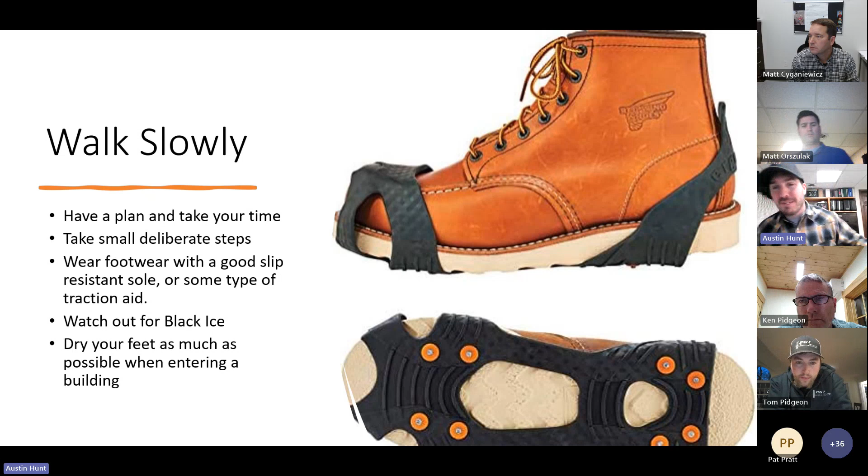In the winter or all the time, avoid carrying so much that you obstruct your view. Scan your route 6 feet ahead. Have a plan, take multiple trips if you have to. Ask for assistance or use equipment that's on site. It might be asking the operator to just pick something up and move it for you, so you don't have to. Just be careful and ask for help when you need to.

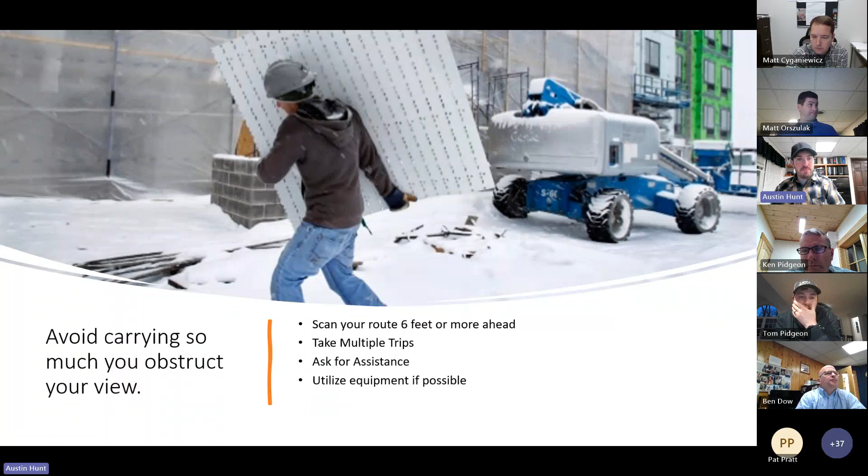Take extra care when you're getting out of vehicles and equipment. Use those 3 points of contact, use handholds to get down. Step slowly out onto the surface and test it before you step down. Put your full weight on there, because don't just jump down and have the piece of equipment thinking the ground's fine. That's how things happen. We've had people fall, hurting their shoulders, things like that, hurting their knees.

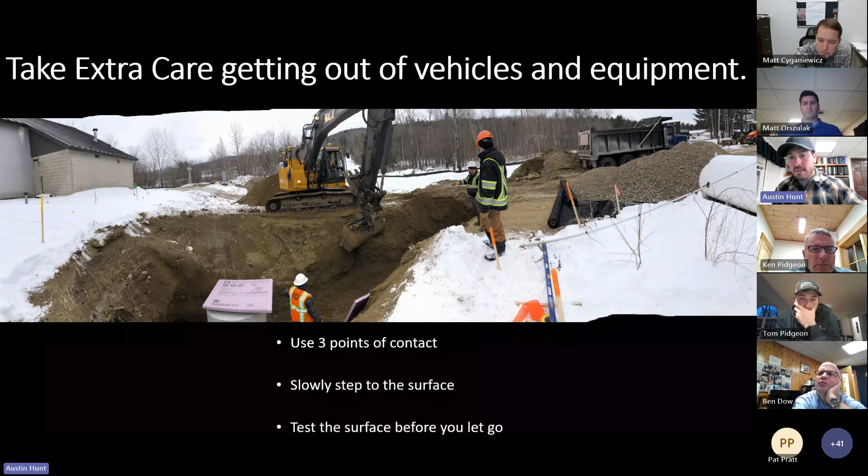Frost blankets: don't walk on a snow-covered or ice-covered frost blanket. You never know what's hidden under the blanket or the snow, tools, materials. The blanket might be covering an open hole. Last year we had an issue with someone who walked across a frost blanket and then stepped in a hole that was underneath it.

If you do need to walk on them, make sure the snow and ice is clear, make sure it's dried off, and make sure things are marked underneath so you don't end up stepping in a hole or tripping over some material left under there. In the winter, say on a concrete site, there's a lot of wood involved, and a 2x4 that was pretty visible the first day could be covered up overnight by snow. So you got to look out for those things.

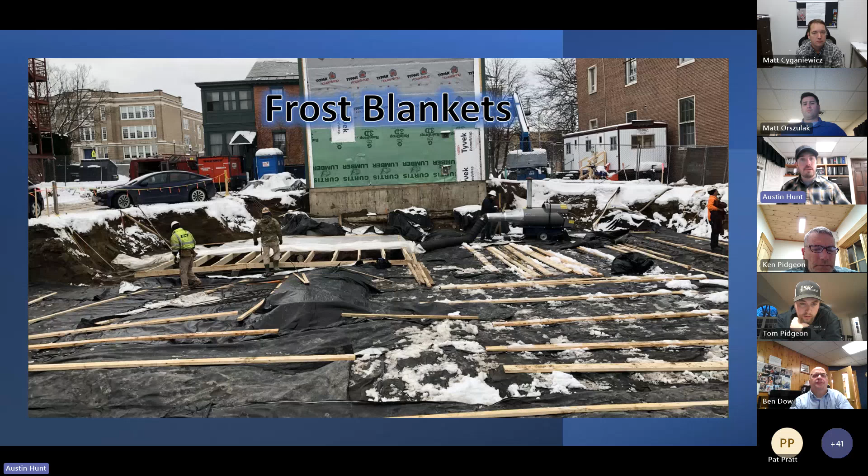Keep your work site safe. Every morning, if you've got snow, make sure you take the time to clear it off where you're going to walk and where you're going to work. If you need to, use salt or sand to assist in traction. You should have some type of salt or sand on site every day in case freeze-thaw creates ice, you need to melt it. So have that salt on site in a 5-gallon bucket or something.

Try to keep your work areas as dry as possible. So if you've got a concrete mixer, make sure they clean out and don't leave a big water spot where it's going to freeze right in your walkway.

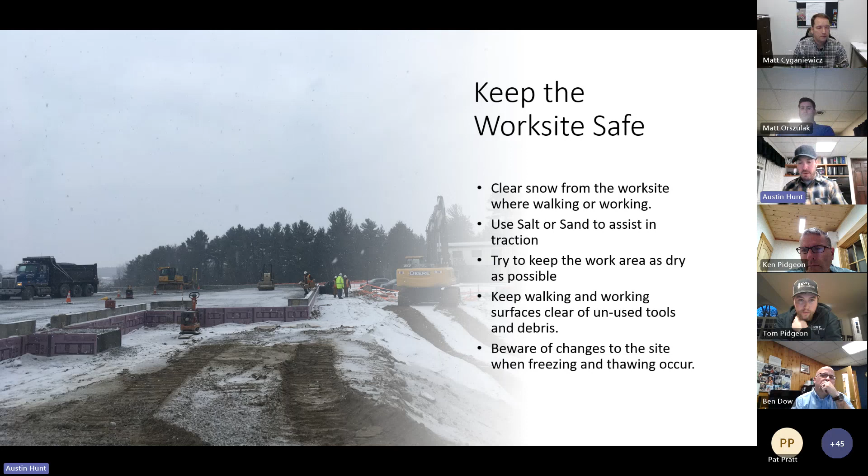Be aware of the freezing and thawing. It's not just the ice you got to worry about, it's the mud too - that gets slippery as well. Another tip I found: if you have a slope you have to walk up and down a bunch of times, build a nice stairway down to it. Just be safe, take it slow, and watch what you're doing. That's all I have for you.

Plan ahead is one of the best things we can do in winter conditions - really plan ahead and try to eliminate slip, trip, and fall hazards using the best practices Austin talked about. If I'll be walking on frost or concrete blankets, the best thing to do is throw down a couple planks and make sure they stay dry and ice free, so you're standing on something firm that won't slide under you.

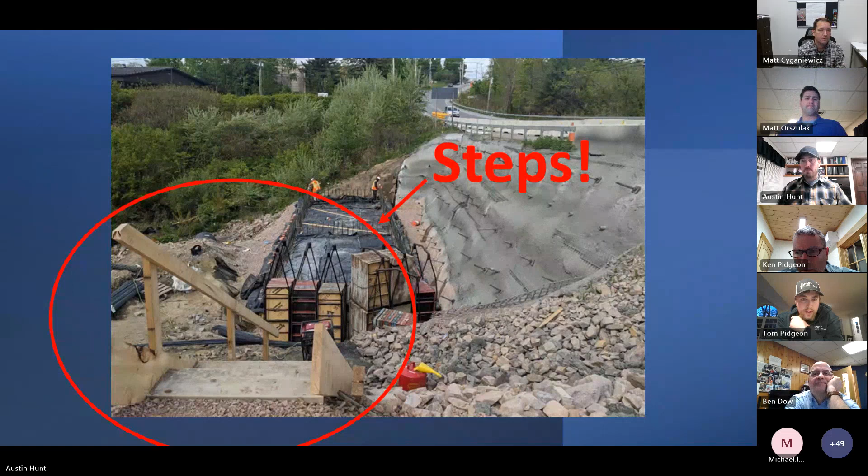Is it working, Ken? There you go. See it okay? There it goes. Good, okay - avoiding slips, trips, falls. Thank you, Austin.

So, announcements: we have the Christmas holiday coming up. In case you hadn't noticed, we're at the end of the year - there's only 3 full weeks left, and one of those weeks has the holiday in it. Things are going to come to an end quickly here for the year - it's closing fast because it's creeping up on us.

Christmas holiday schedule: Friday the 22nd, before the long weekend, 6:45 a.m. to noon would be hams and bonuses. Bonuses, Ben? You're giving out bonuses? Yep, and you just said it, so I'm doing it for sure now. That would be at the ECI office, the operations office, I should clarify.

Then Friday later that day at noon, we'll have the Christmas barbecue. We'll close early for the Christmas barbecue at the main shop. And then on Monday, of course, is Christmas itself, so we'll be closed for Monday.

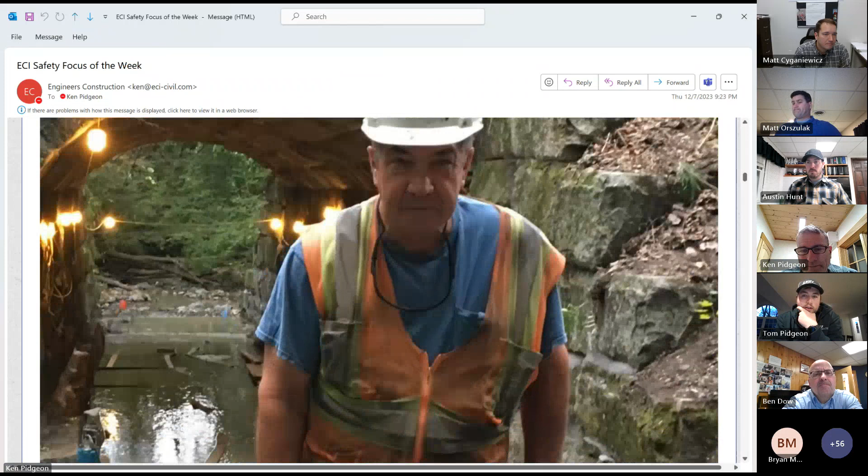Okay, we'll move on to the Associated General Contractors of Vermont, the AGCVT, which had their annual meeting. At the lunch meeting, ECI was recognized as one of the initial 8 contractors that enrolled in the newly formed VOSHA Safety Alliance program. Each contractor received a flag to display in recognition of their participation. There we all are out there.

So Ken, I want to thank you for being the president of AGC. I didn't know if Ken was going to tell us that, because he's kind of humble that way. I do have fear about that. I got to say, the best thing about being president is being the past president. No, it actually was a great experience. I enjoyed it thoroughly.

The evening banquet was a more formal event that included the induction of new directors and executive officers, with myself handing off the gavel to Jason Seacard, the incoming president. The program also included awards, a speech from Governor Phil Scott, and fireworks, as maybe a lot of people saw in the news. These were actually 2 awards that we, as an organization, were given and recognized for this year.

Related to some legislative advocacy, not so much towards our industry, but in general, because the AGC was helpful in a very bipartisan way of helping candidates who want to participate by being a legislator, helping them get set up and understand the ins and outs of how to do that. We were very successful, and it was pretty cool.

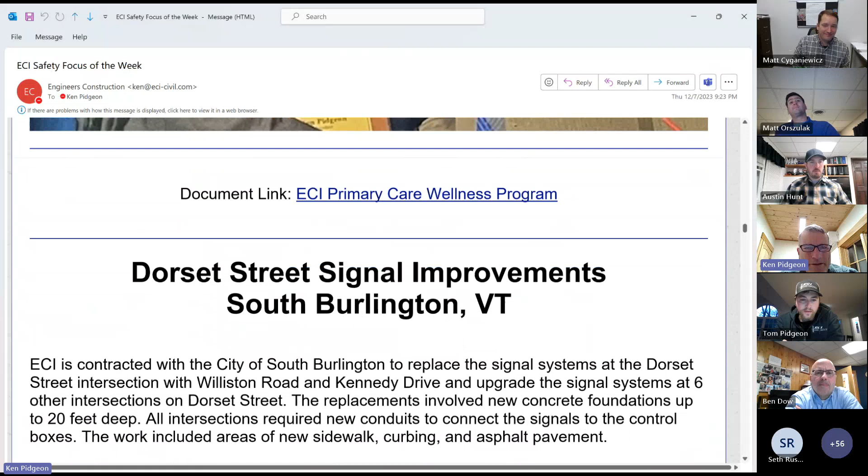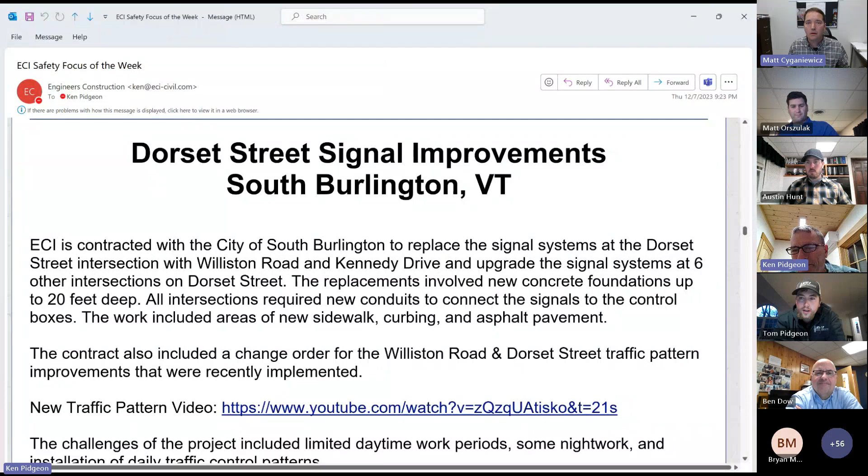Matt Cyganiewicz is going to present for us. Matt, do you want to take over the screen or do you want me to scroll? No, I will take over the screen, I've got a couple of things set up. Let me just take it over here and we'll make this flawless. You can finish up on the archive project too. Okay, thank you, all right, rather than switch it back to me. No problem.

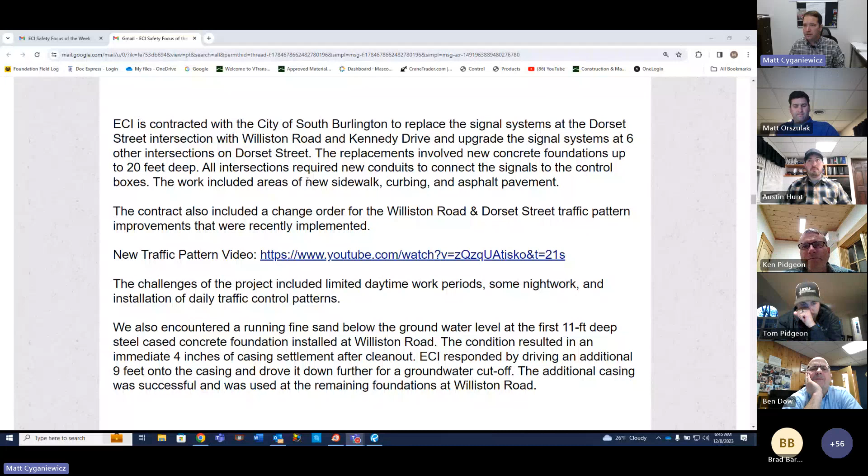You guys can see my screen here. ECI is contracted with the city of South Burlington to replace the signal systems at the Dorset Street intersection with Williston Road and Kennedy Drive. So that whole corridor, I have a map I'll show you guys after. The upgrade covers 6 signals in between Kennedy Drive and Williston Road.

The replacements involve new concrete foundations up to 20 feet deep. All intersections require new conduits to connect the signals to the controller boxes. The work included areas of new sidewalk, curbing, and asphalt, which were disturbed because we had to run conduits or sleeves under the roadway. So there were a lot of pieces and parts that needed to be put back together, and the concrete guys and asphalt guys really kept up with us and kept pedestrian traffic moving smoothly.

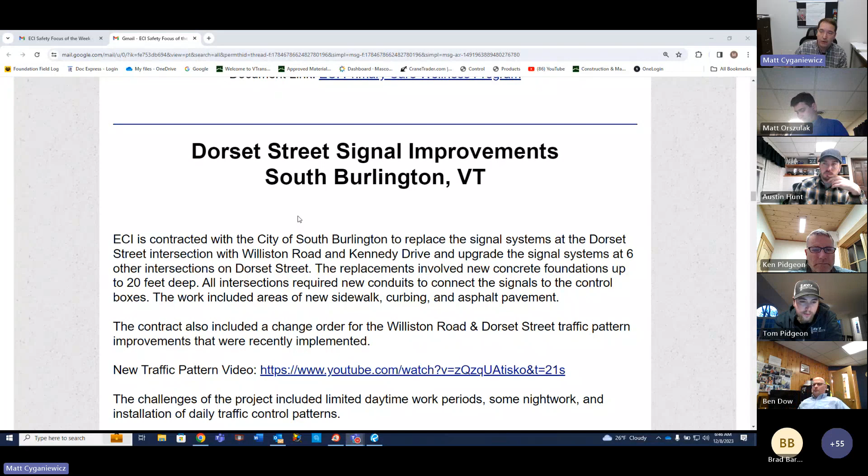This contract, this is a pretty good change order. It was pretty unique and I'm pretty proud of it. People are still trying to figure it out. I'm going to play a video here to show you how it operates now, you guys probably drive through this every day.

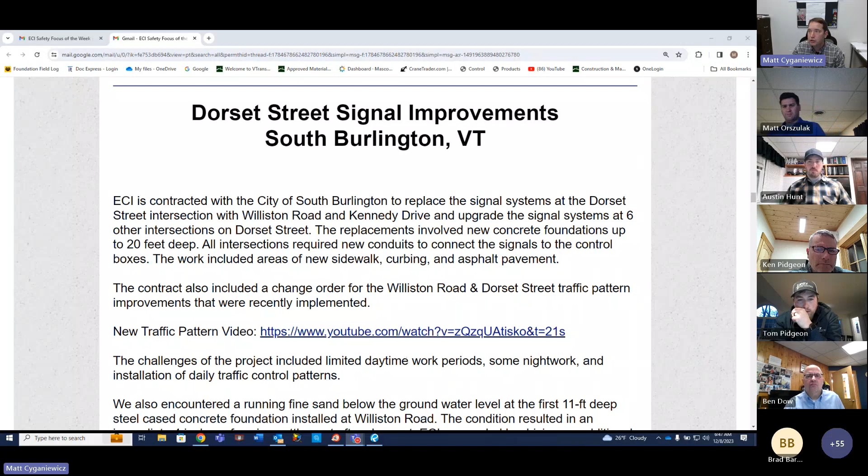The contract also included a change order for Williston Road and Dorset traffic pattern improvements. I'm going to play that right now, but I'm going to switch screens to make it go smoothly. Matt gave me a little rundown on this, so there shouldn't be any hiccups... the pressure is on, Matt.

Okay, does everybody see South Burlington Public Works here? Yes. Awesome, here we go. This is really nicely put together, it's on their website, kind of public outreach to let people know the new patterns. And here we go. Cool.

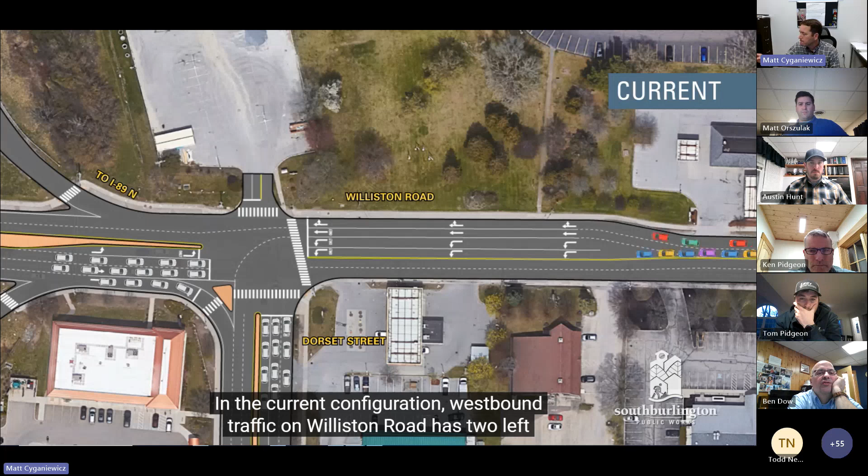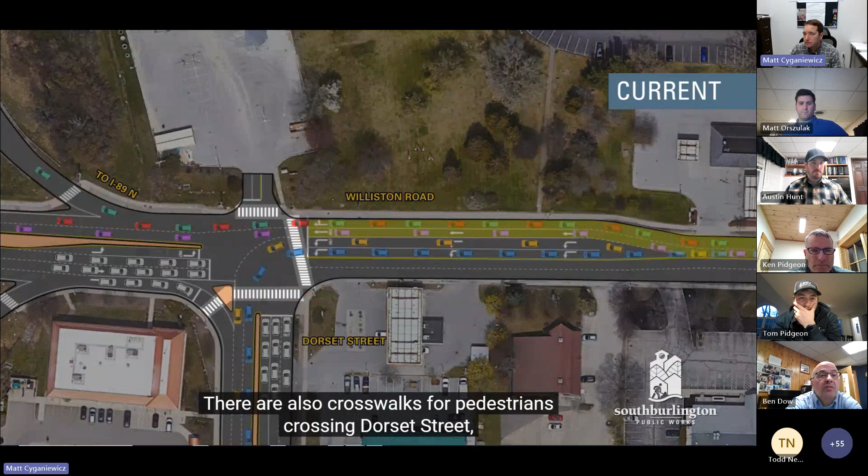The intersection of Williston Road and Dorset Street is undergoing changes to help ease traffic congestion and improve safety for all users. In the current configuration, westbound traffic on Williston Road has 2 left turn lanes and 2 through lanes. For people continuing straight through the intersection to get on I-89 or go into Burlington, they are required to shift to the right to stay in their lanes and proceed through the intersection. There are also crosswalks for pedestrians crossing Dorset Street, the hotel driveway, and the eastern leg of Williston Road. In the future configuration, westbound traffic on Williston Road will have 1 left turn lane, 2 through lanes, and 1 right turn lane. This eliminates the lane shift and allows drivers to proceed in a straight line to continue into Burlington or onto I-89 northbound.

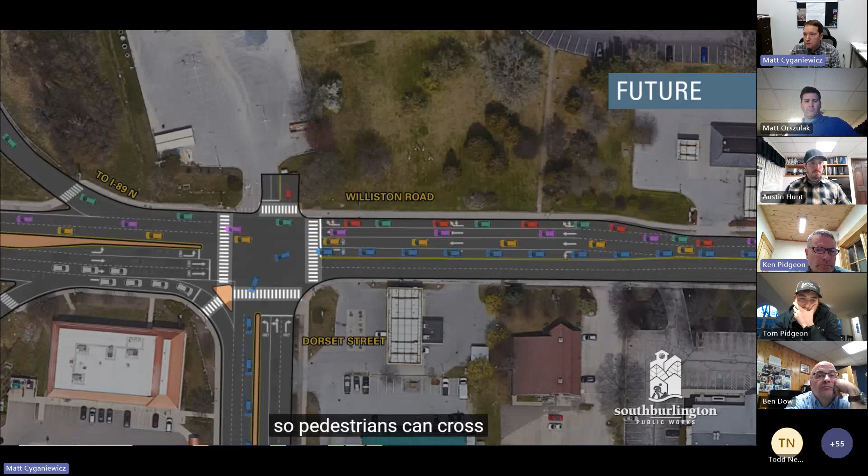For those wanting to turn left onto Dorset Street, there will be only 1 left turn lane, which provides enough capacity to keep traffic moving smoothly. The right turn lane is now for entering either the hotel driveway or for getting onto I-89 northbound. The last change is that there will be an additional crosswalk across Williston Road, so pedestrians can cross in any direction on a crosswalk while all traffic is stopped. Please stay alert and take extra caution while everyone adjusts to the new intersection design.

It's going to be a lot better, Matt. Yeah, for sure, that lane shift caused quite a few problems. Yeah, it's definitely a nice improvement. When they presented it to me, I was all for it. There's still some confusion out there, but we'll get it. That's because everyone was confused with the old pattern, not for any other reason. Exactly. Now that lane needs to be paved, Matt, that on-ramp lane is rough.

Yes, it would be nice to do a nice milling project and new pavement project through that whole intersection. I would suggest that, but I think Jim, you'd probably kick my butt. Maybe next year, maybe we could get it done by the end of the year.

You keep telling us about all these change orders, get another one.

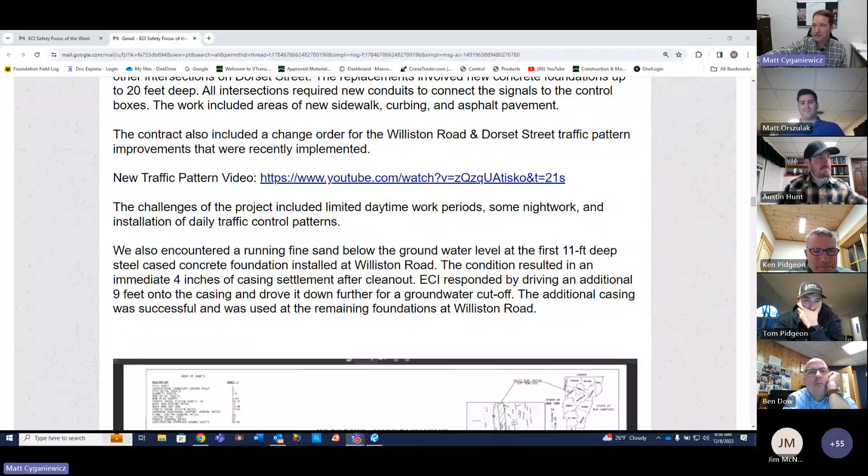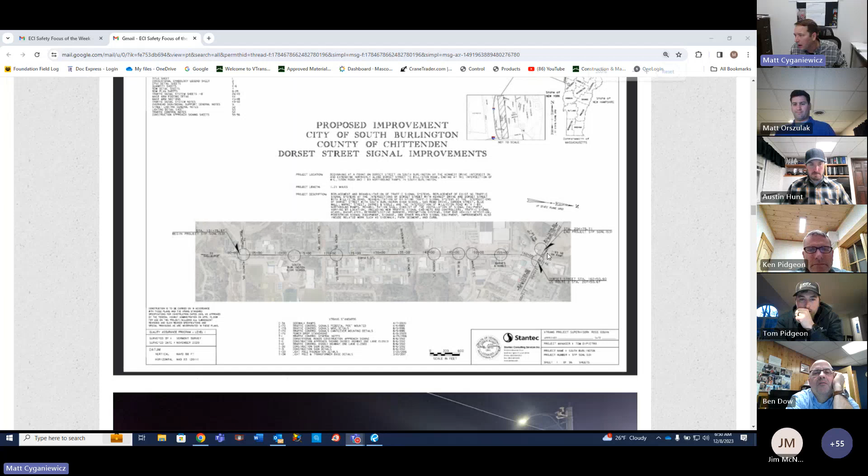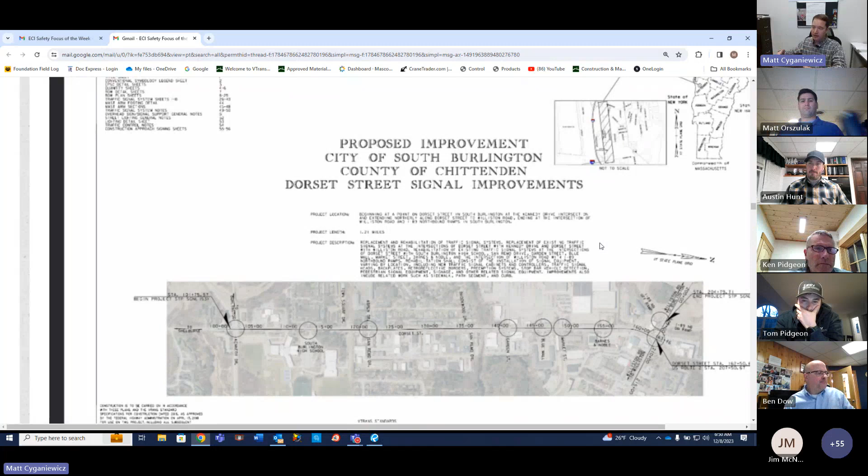Right, no problem. So I'm back to the original screen with the map on it. Everybody good? Okay. So the widening, I should have kept the other video up, but basically we had to move the on-ramp portion, slide it over 2 feet. With that slide came granite curb, new sidewalk relocation, and paving all that area in. I think it turned out really well.

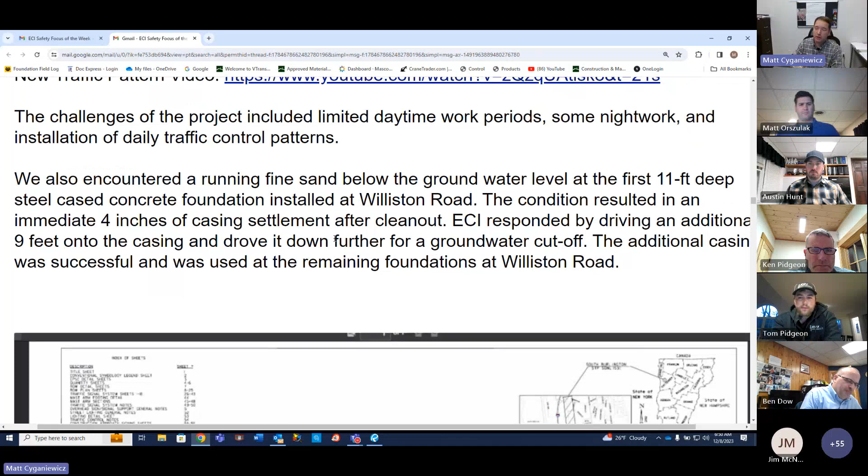During construction, the foundation design process, and installing these foundations for the new signal systems on Kennedy Drive, and really we had the issue on Williston Road, we also encountered running fine sand below the groundwater level at the first 11-foot foundation, steel casing, concreted foundation installed on Williston Road. The condition resulted in an immediate 4 inches of settlement. So once we encountered that, we all got together and came up with a plan.

ECI responded by driving an additional 9 feet of casing down further for the groundwater cutoff. The additional casing was successful and was used at the remaining foundations at Williston Road. So the ground conditions were not as great as we thought they were.

We drove the first 11-foot casing and it started to sink. At that point, that one was already driven, so we had to do a vertical weld for the next piece. All the other ones were installed - I believe, and I could be wrong, the guys will have to correct me - they might have had to weld more pieces onto them, but all 20-foot sticks. Wow, 20-foot sticks in the ground.

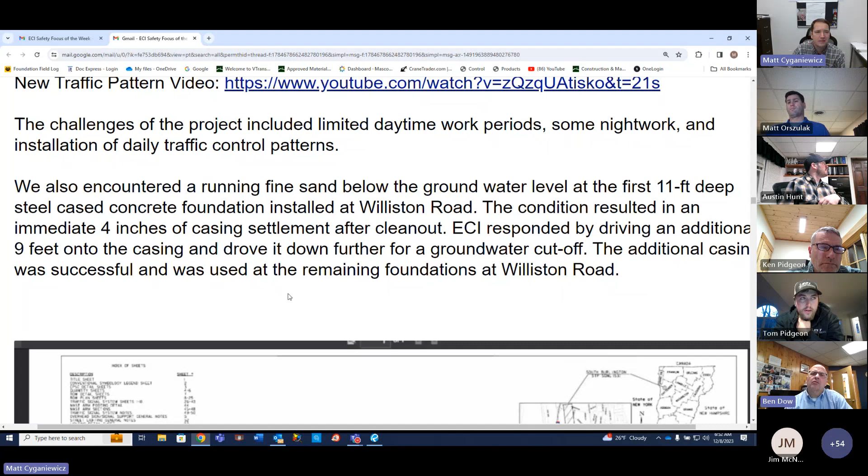The actual concrete foundation depth stayed the same, but it kind of toe-nailed it in and cut off the groundwater, so it was stable. We've used this in the past on other projects and it's been very successful.

So this is the corridor, I hope you guys can see it really well. This is Kennedy Drive, this was a span wire. We replaced the whole intersection, a complete intersection replacement. Same with Williston Road and Dorset Street, that was a span wire. I think you guys have noticed they're mast arms now, they look really good and clean. Everything else in between already had mast arms. So what they did was choose to upgrade the equipment - a lot of newer equipment, safer, more visual, and we installed new detection.

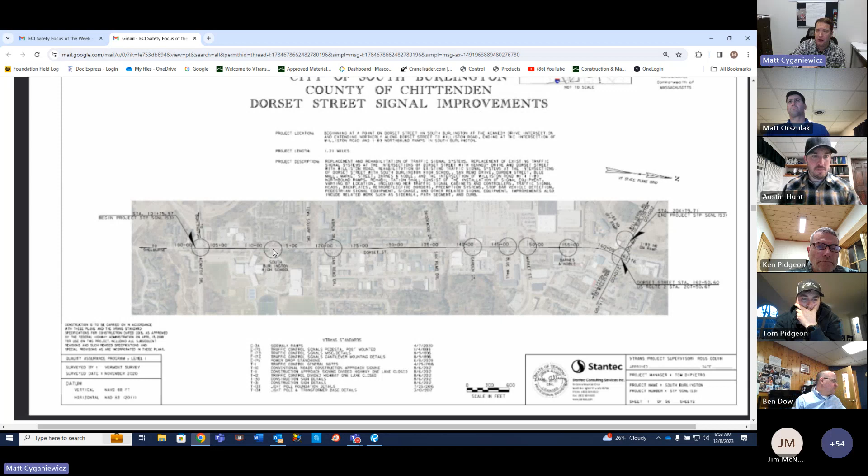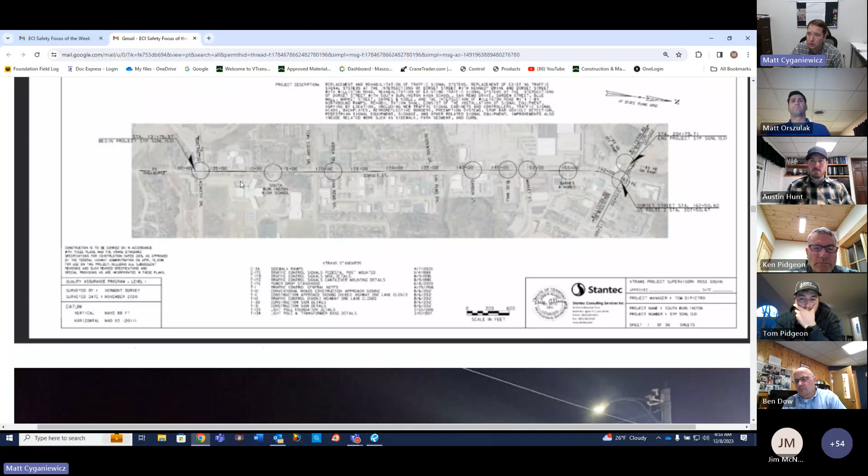This whole corridor, I don't know if you've driven down it recently, but it's a pain in the butt, it takes forever to get down there. Once we're finally completed, it'll be a lot easier, a lot less congested. You won't be stopping at every red light. It'll be a lot better, maybe like a shortcut to work to get you there quicker - won't be such a pain to drive through.

So here is a picture. During the project, there were original conduit sleeves under the roadway to connect the old system, and they wanted us to use those. The problem with using them is they weren't to the capacity we needed that they said they would be. So we did another change order to install new sleeves to give adequate conduits and spares for the new signal systems.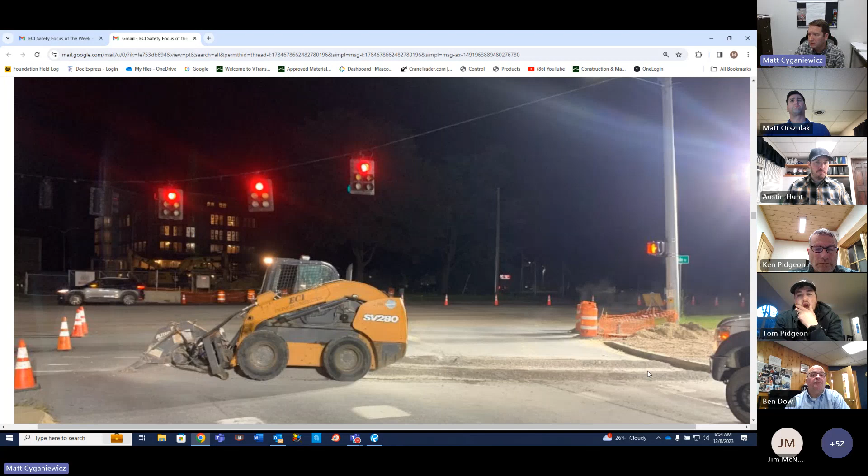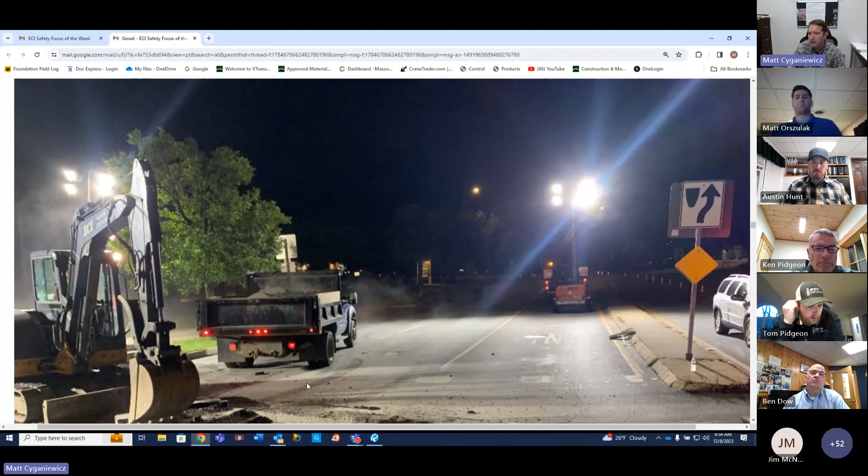You can see Larkin's new building in the background here. The guys are frost cutting the pavement so we could dig it up and put in our new sleeves. We chose to do this work at night just because of traffic - it's one of the busiest intersections in the state. You can see here where we're starting to peel away some pavement and start digging it out.

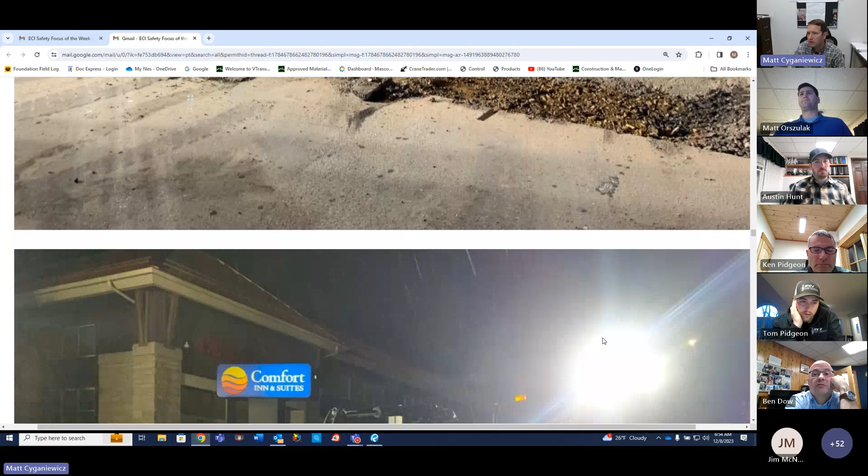Looks like we work in any weather condition here - a little bit of rain going on. You can see that we're digging them out for the new sleeve here.

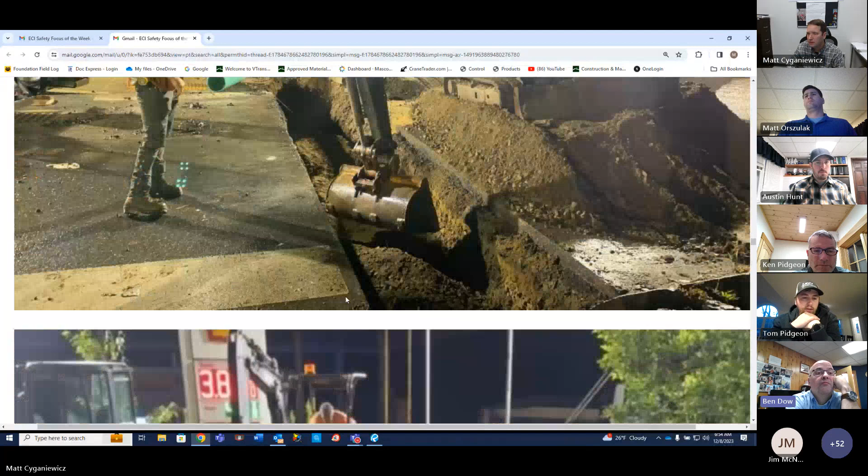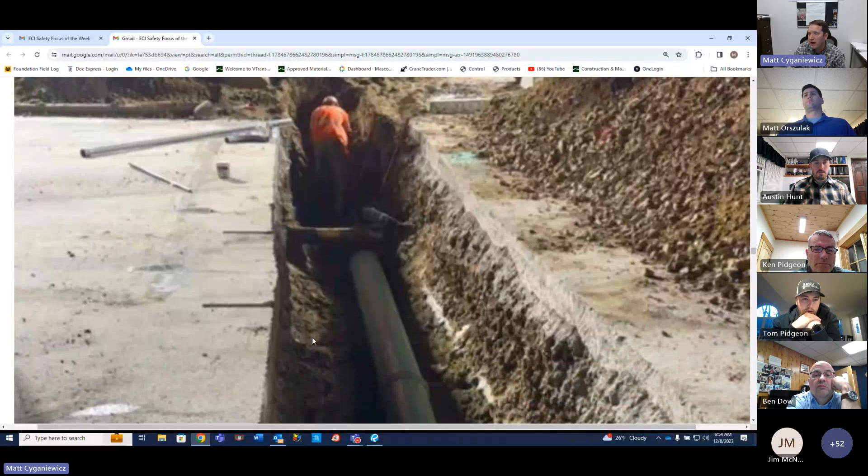And then here's the guys connecting a lot of utilities on Dorset Street - they're everywhere. Luckily we took good photographs. Tanner and the crew took good photographs and tried to keep up with all the utility conflicts out there.

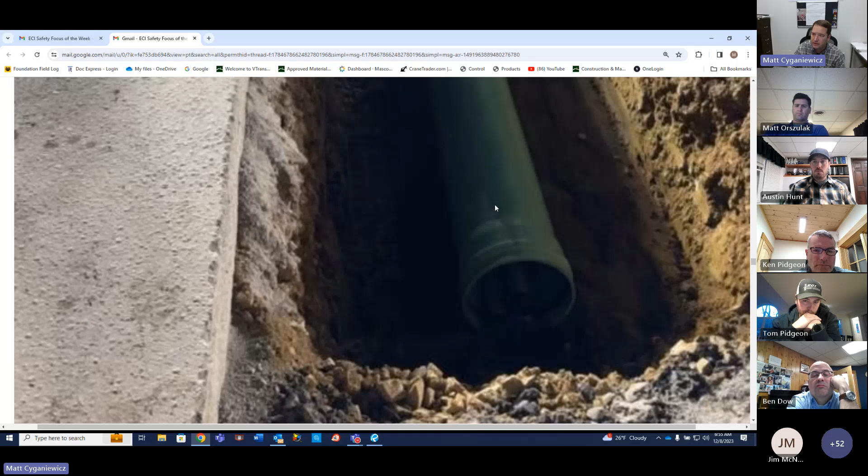We can see a nicely laid conduit sleeve, and we'll actually put more conduits in this sleeve. Here is a good example where we had to pass through here with a sleeve and then repair the concrete afterward. The concrete division was always there, ready to go, staying ahead of us.

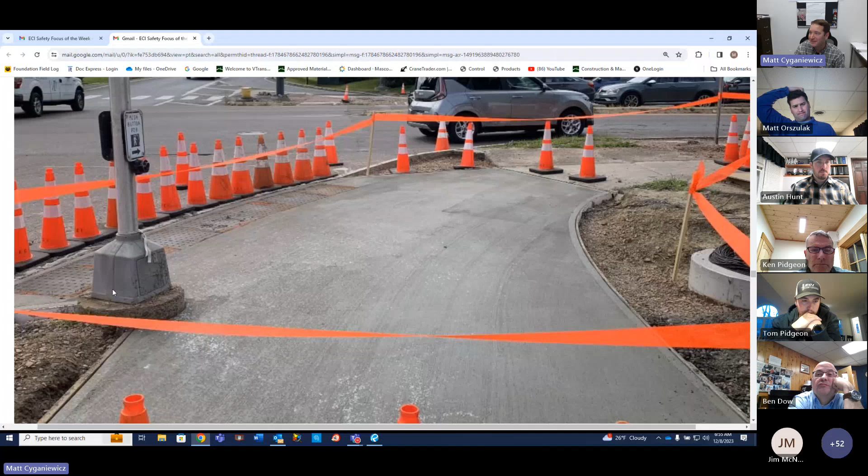So the pedestrian paths were passable and safe for pedestrians. It went really good, and you can see here we don't want anybody to step in the new concrete, so we kind of overused cone quantity.

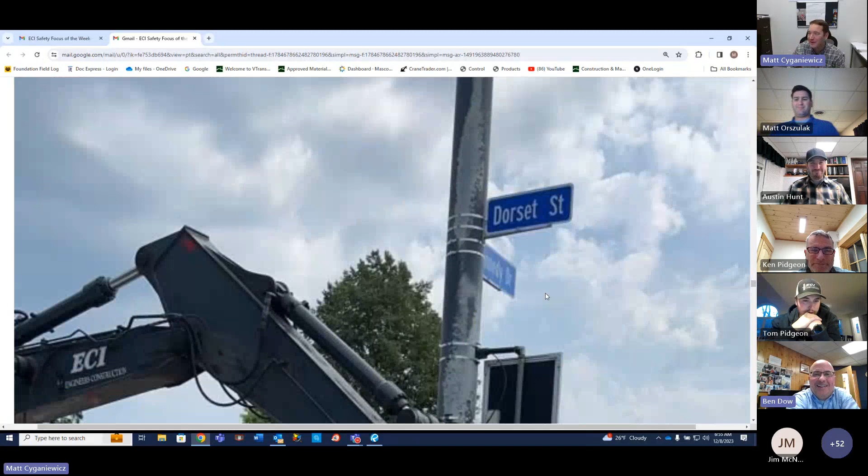And then here is the guys driving in one of the 20-foot cylinders for the foundation. These go really well, they work so good - look at how minimal the disturbance is here.

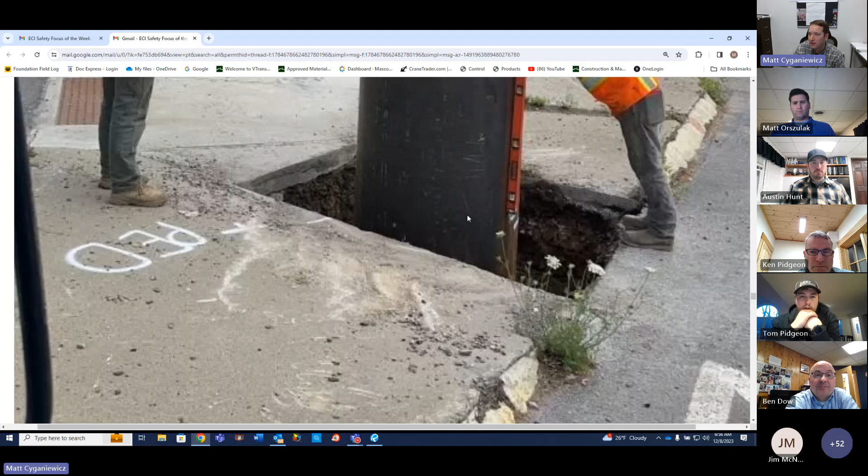I don't know if you guys know, this is Peter Larson and Tanner Chaffee.

Look at this work - we didn't mention in the write-up one of our prime subcontractors either. Christ Electric. Yes, should have Steve mentioned that. Yeah, he is great to work with. We started working with him maybe 3-4 years ago. He's an electrician, but he looks at the whole project and really feels like he's almost an ECI employee.

Gets right involved, making sure the quality of the work is good with us, to meet the standards with his electrical side.

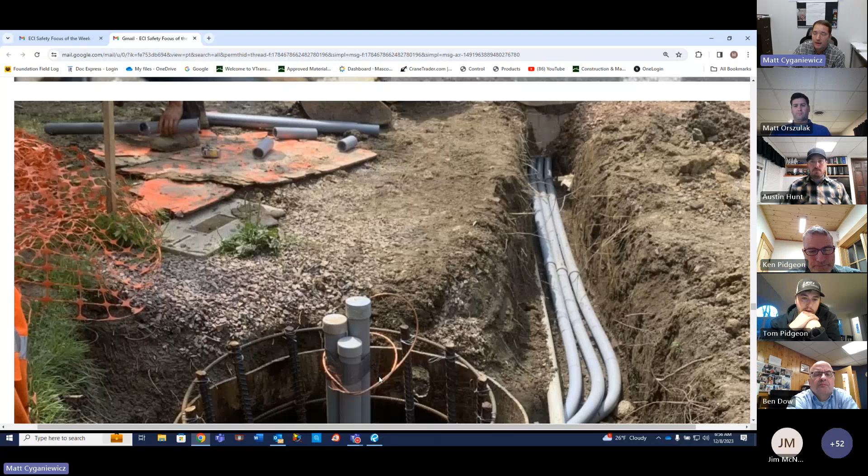So you can see here, nicely laid conduit run, nice and smooth. Everything came up perfectly in the middle. Grounding wire. We do put on a riser here that will be removed because the top portion needs to be exposed concrete.

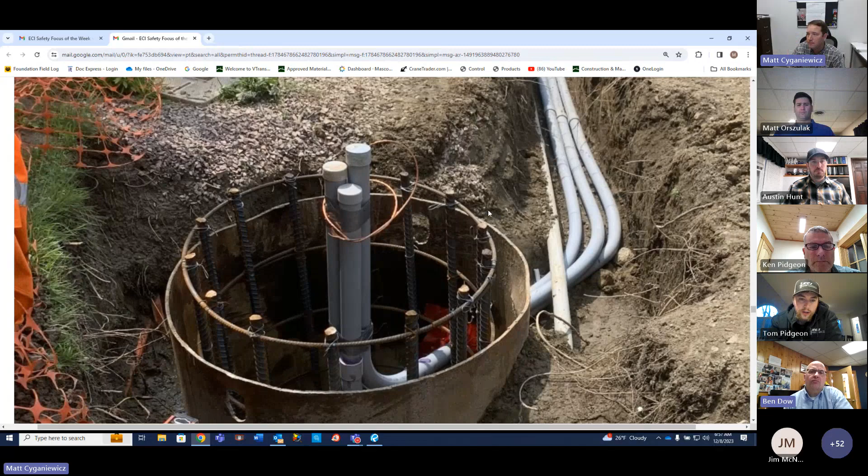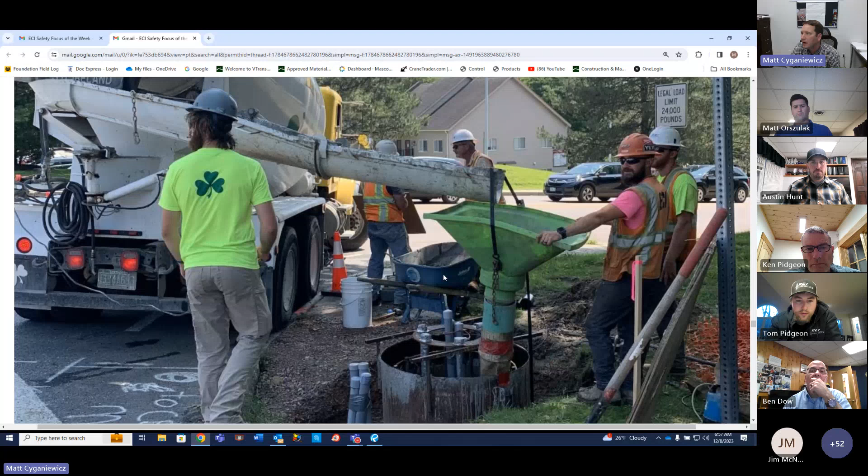It looks like we used SD Ireland to pour these, and you can see the guys following suit with the trunk to get the concrete in the tube so it doesn't splash out at the bottom. Let's see, Calvin, I can't tell who that is, maybe Tanner. But yeah, it went really well.

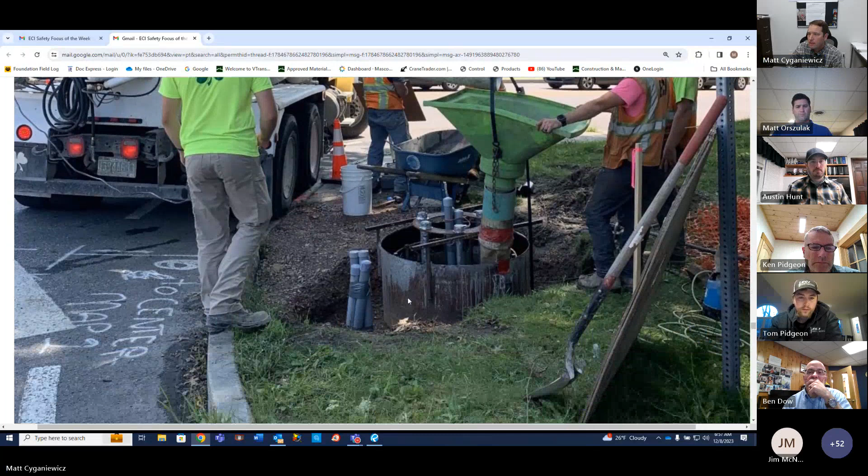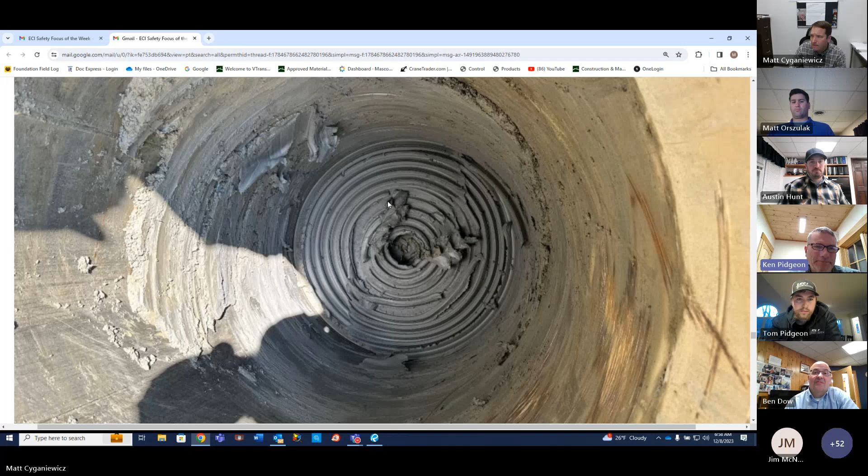This is a cleaned out foundation, and of course you see a nice section of clay down here. Which isn't a bad thing, because it kind of plugs it from groundwater coming up. Yeah, that makes a nice plug, and you could see it's like pottery down there.

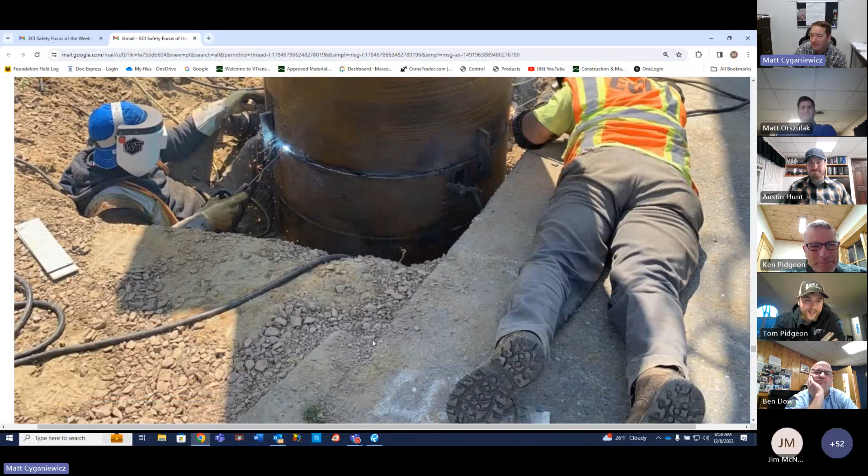Matt was on vacation that week and we just fixed it for him, took care of his problem. I came to work, heard all the news, and I'm like, what are we gonna do? And they're like, it's already taken care of, Matt. So thank you guys very much for that. I love how everybody just pulls together and gets the job done.

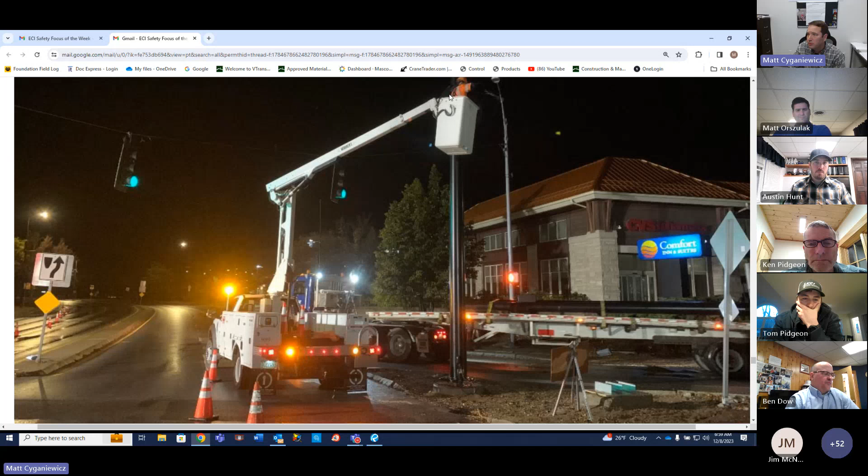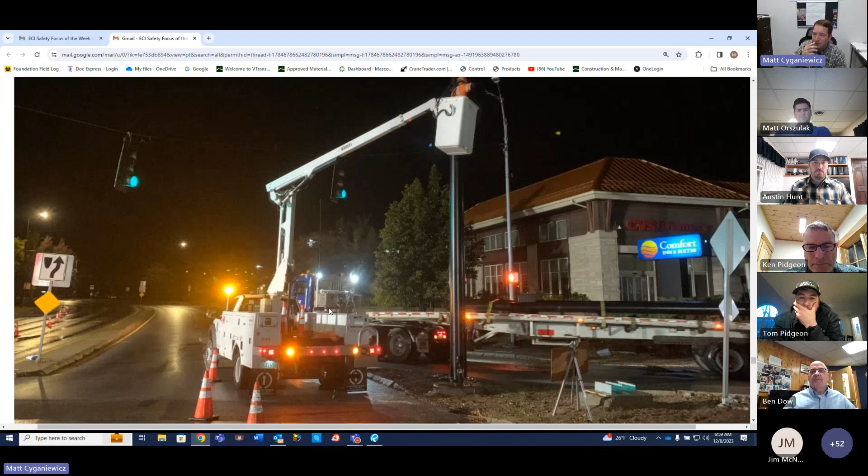This is the span pole right by the slip lane coming off of Williston Road onto Dorset. It looks like the guys are working on a luminaire and got the arm or the mast located. We have to use bigger flatbeds to bring in this stuff, especially the arms, because they're all preloaded. We hang them up. It's really efficient, works really well.

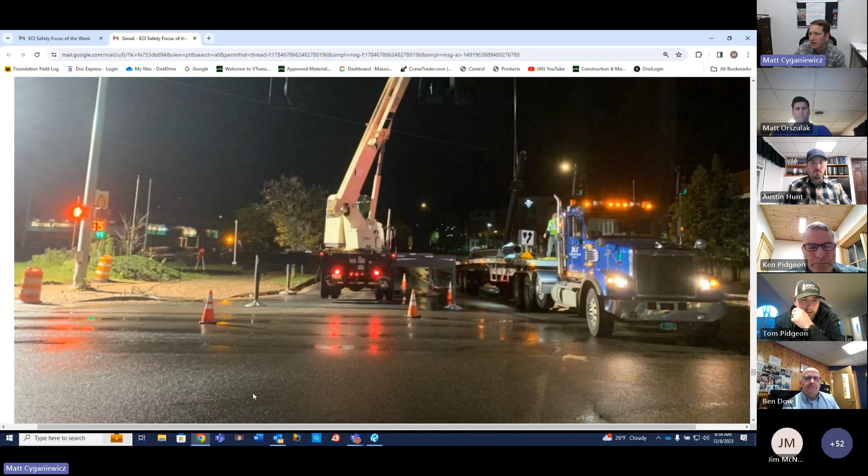And then you can see the crane here lifting. Again, I think this was the night we set all the masts. So these aren't arms, but still handy with the crane. Fly them in, set them in, very safe. Luckily, power wires in these locations were very limited, but still a concern as always, and caution to work around.

This is Larkin over here, or the old Holiday Inn. So this is that corner with the new dedicated right turn lane. You can see the guys have the mast arms up, bagged at this time until we could take down the other span wire. New traffic cabinet.

And that's about it, the project is still moving forward. We have everything in the middle to kind of work with, but all the ground infrastructure is done and sealed, thanks to the concrete division and the paving division. Everything's ready for winter plowing, sidewalks, all that great stuff.

So from the photo archives, Dorset Street, Potash Brook Culvert Project, September 2001.

I thought this was the one by Grandview condos. Yeah, just past Kennedy Drive, just south of the intersection. Yeah, okay, because I know we did one kind of closer to Hinesburg Road in that parking lot that was pretty deep, it was like a stormwater replacement. The interstate overpass would be just to the left, right? Oh, gotcha, yep, that's right.

Ben Dow with the orange. Is that Lee Brown from Vermont Gas? Can't tell, looks like it. And then on the left is Steve Shagnon. Oh okay, look at Steve, see his ponytail, yeah. What was that, an 8-inch gas main? Looks like a pretty good big size one, yeah.

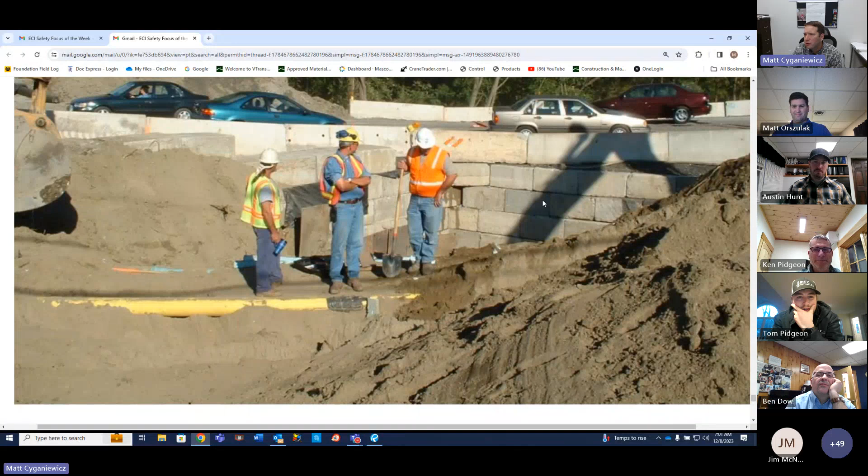Very cool, good shoring. Yep, wow, great, so that's what we got. That's it, turn it back over to Matt and Austin.